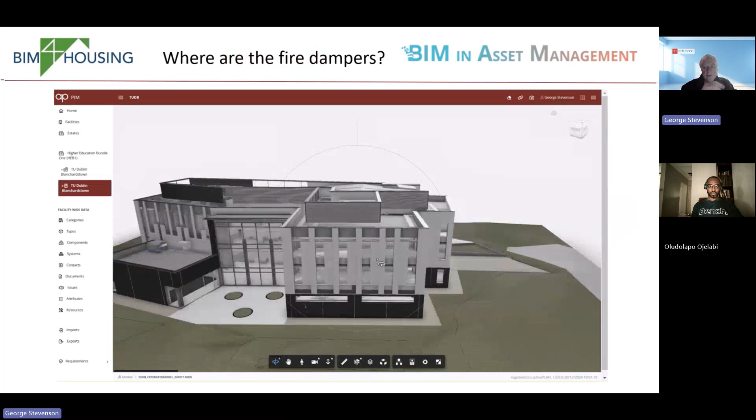So in this particular case, OpenSpace was one of the applications that the contractor Rattigans used. This is showing the integration we've got with Revit. So we've got the Revit model, we've got the fire dampers there, connected into the COBie data, so the list of all where the fire dampers are. We've got the product library, which is tied back to the manufacturer's product data.

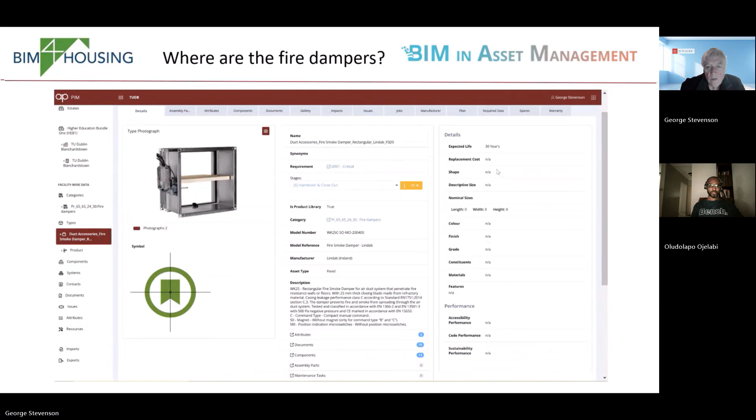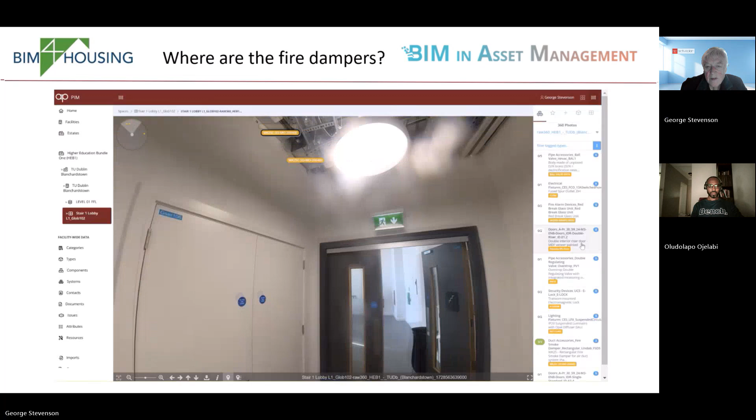And then we can look at that in ActivePlan, the interactive plan view. So you can see where the fire dampers are, and you can also select the individual damper and see the schedule for it. This is the 360 photo that was taken by the team doing the construction.

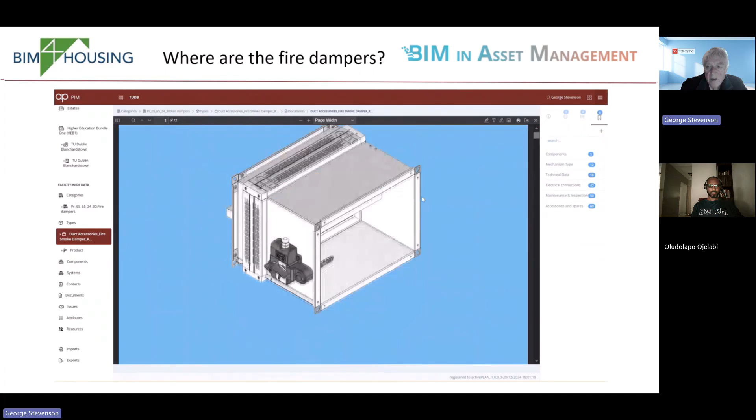So we've simply downloaded that into ActivePlan and then tagged it with the information for that particular fire damper. This is the documentation that came with that fire damper, so you've got the operating and maintenance information specific to it. You can also put bookmarks in to take you to certain pages.

In addition, we've got a digital record of the other buildings where that particular fire damper was installed, and the database also holds information about how it should be maintained and what the tasks are. If you've not got this video, I can send it to you.

But yes, the point is that the 360 photo has been taken, not by us, but by the contractor. They just put a hard hat on with a 360 camera mounted to it, and they walk around the site every week, and that's captured in OpenSpace. And that same 360 is what comes into ActivePlan — correct, yeah, so the 360 photos that we've got in ActivePlan.

Let me... got to the wrong version.

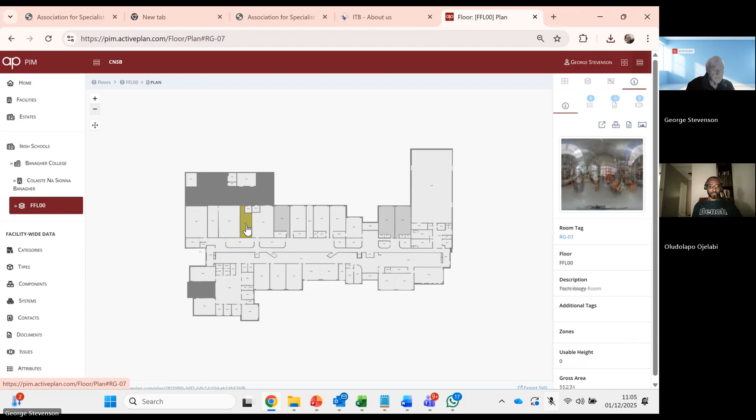So each of these spaces has got, see there, it comes up the 360 photo. So here we've got the 360 photo.

By downloading the 360 photo into ActivePlan, it can then connect back to the asset data that is supposed to be in that room, or we can create it from scratch. These are all database objects in the SQL database in the cloud, so they're also connected back to the maintenance information.

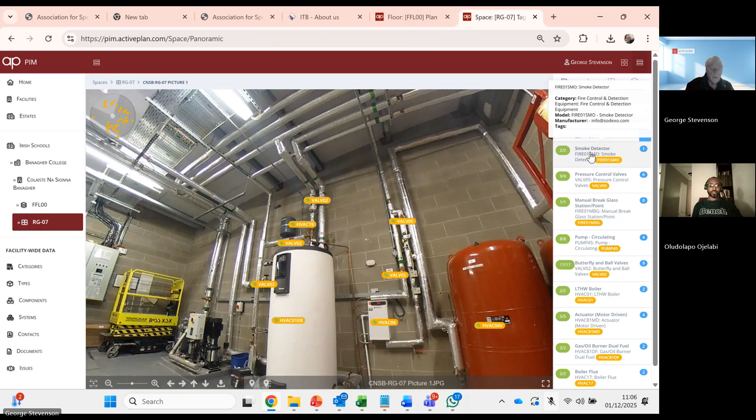So what we're doing is adding a lot of value to what Faro and people are doing. Faro, OpenSpace and the others tend to allow you to tag something in the 360 photo, but it's not connected to the database. What's unique about ActivePlan is that we're actually holding this asset information, not in the 360 photo, it's being held in the ActivePlan database.

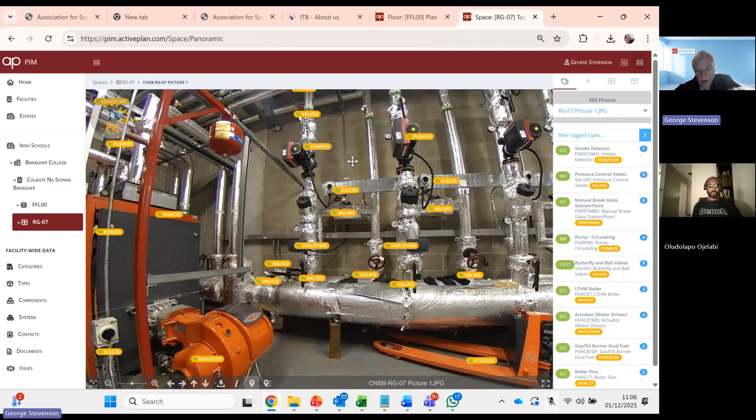So it means that when we go to that space and look at it differently, we can see the asset types that are in that room. This is in the database, not in the 360 photo, and the individual products that are in there.

The beauty is that you can then look at this from a list. If you want to know where that actuator is, you just need to go to that, and it remembers where that is.

And then, if you click on that, you can see all the detail behind it. If the serial number and things like that have been captured, then you can see that. You can also go into the detail of the type of thing that it is, and if we've got the actual manufacturer's product information, that would be there as well.

And any documentation. So the approach with Faro is that they are collecting information, or the contractors are using Faro to collect the information for construction purposes. We're just looking to use the same 360s that have already been taken for asset management.

So let me just give you an example. This is the way I'm promoting it. We're calling them Smart 360s.

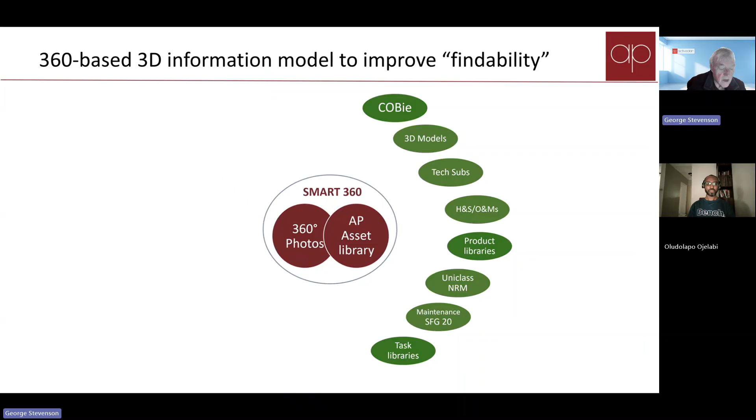The principle is that we've got the 360 photo, which is actually quite dumb, because all you can do is look at it. And we've got the intelligent asset data. So we bring those two things together and create something called a Smart 360. We can then use that to tie back into COBie data, 3D models, O&Ms, etc. We can tag manufacturer's product data to it, task libraries, and because it's in a database, you can do that.

We're not bothered what type of camera is used to take it. It could be a simple 360 camera like a Ricoh or an Insta, or it could be a Leica, which is probably 30,000 to 40,000 pounds because it does a lot more. Then there's one called a NavVis camera, which you put on your shoulders and walk around, and they cost about 50 or 60,000 pounds. But they're LiDAR cameras as well, both Leica and NavVis. They don't just take 360 photos, they do point clouds, but most of the time you don't need it.

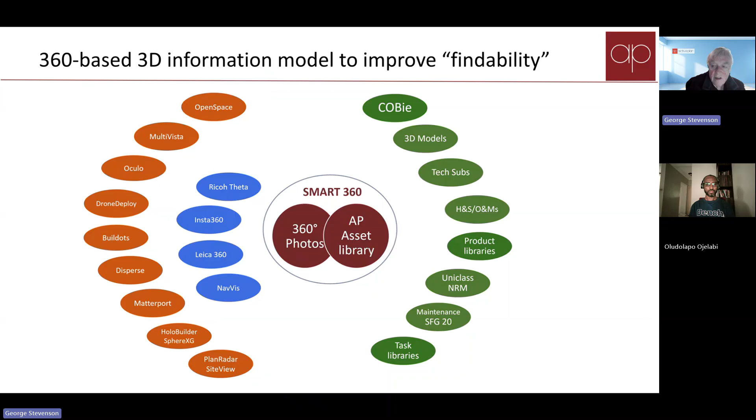And then you've got all these companies who do the same sort of thing as Faro. Faro's solution is called SphereXG. Faro acquired a company called HoloBuilder several years ago, and they've turned it into something called SphereXG.